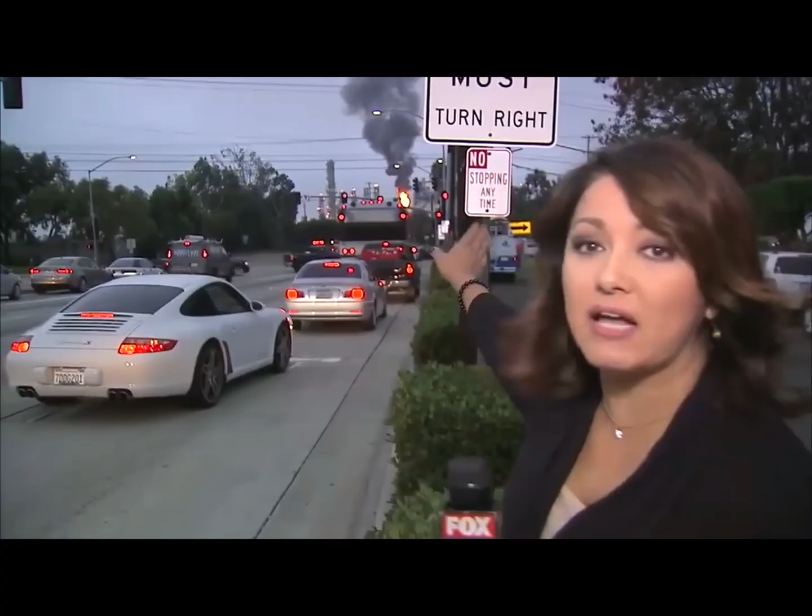Disturbances and incidents happen regularly in refinery utility centers. Operators are key in managing these and preventing that a disturbance becomes a big hit incident. What I experienced as a utilities technologist in the last 35 years is that many big hit incidents could have been prevented if operators and technologists would have been aware of the threats, and of course would regularly have discussed them. There were several actions that could have been taken to prevent the outcome, a total refinery shutdown, even after the first alarms arrived in the control room.

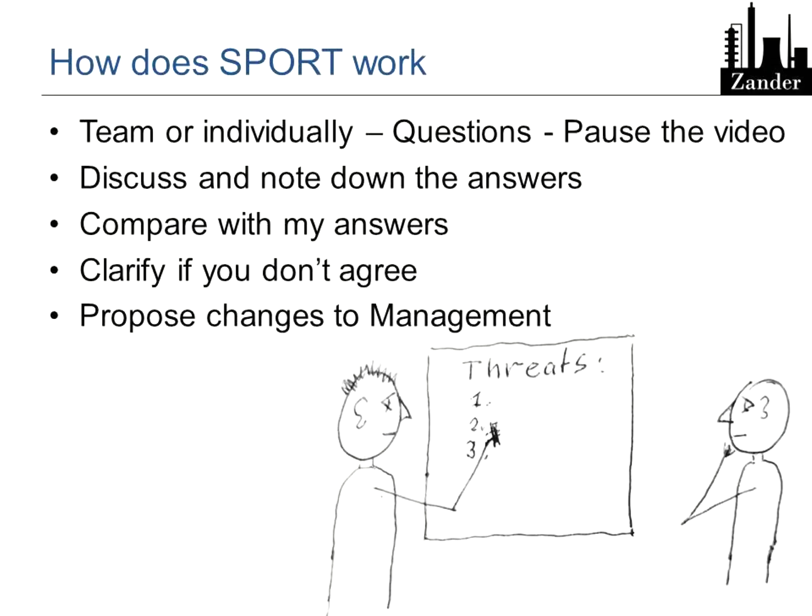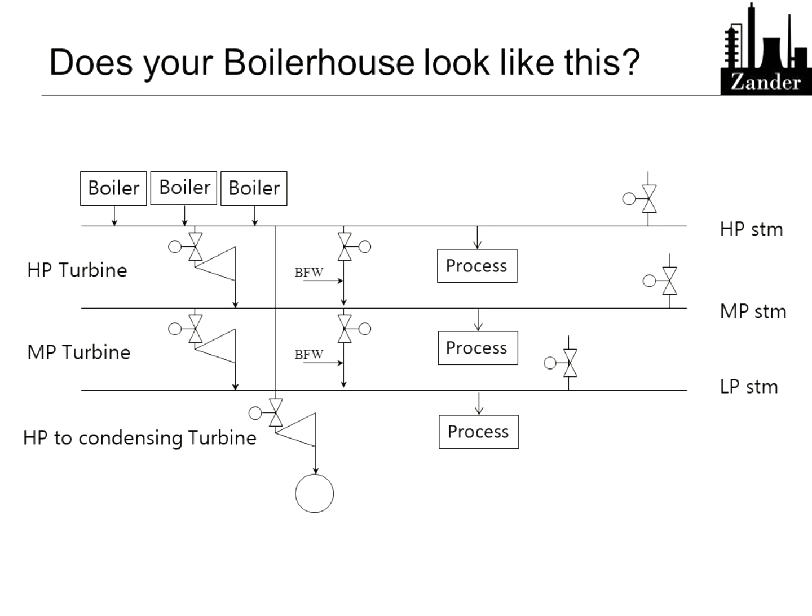Steam boilers are quite standard these days. For this picture, it is relevant that the boiler has a steam drum for separating steam and water, that there is a superheater, possibly with injection water for temperature control.

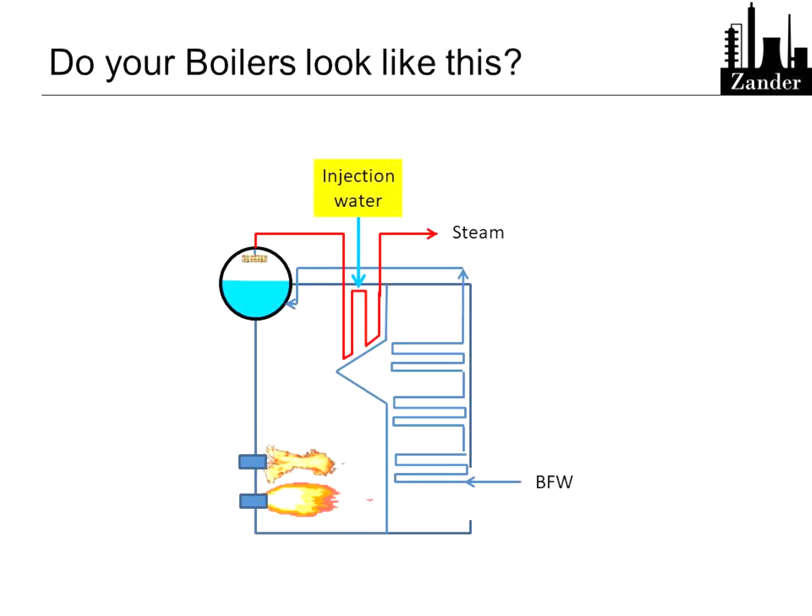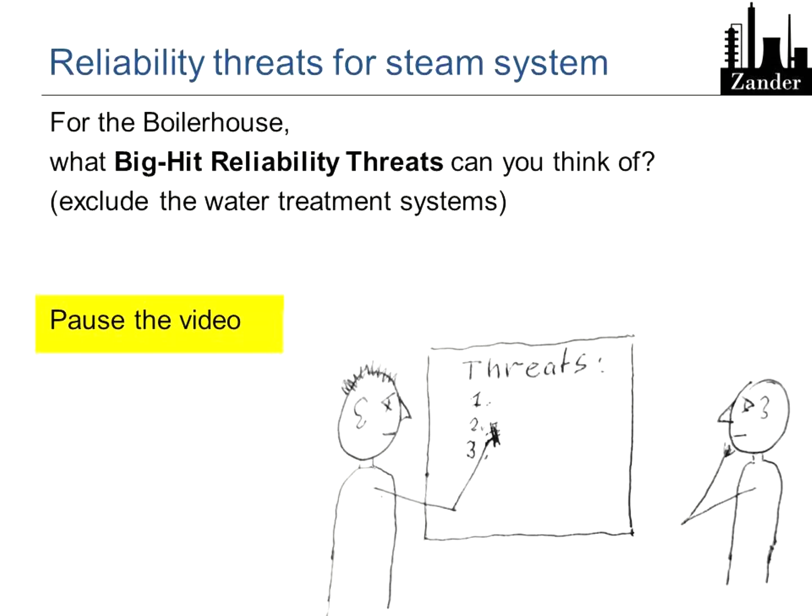In the systems just shown, what could possibly go wrong? Particularly the incidents that bring the refinery down are the ones I'm after here. Please note all your thoughts about risks around your boiler house. Now, please stop the video and start writing. Once you're ready, please start the video again.

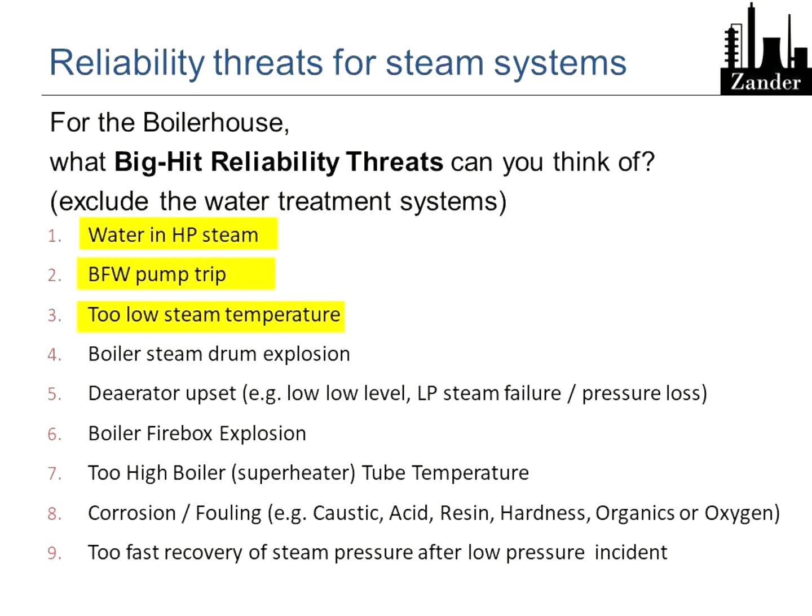I've come across a few incidents where at the startup of a boiler, either the water level in the drum was too high or the startup was much too fast. When steam production starts in the evaporator tubes, the steam bubbles push water to the steam drum. If this happens too fast, the water in the steam drum increases even further and may first affect the efficiency of the separator devices and then reach the superheater as a slug of water.

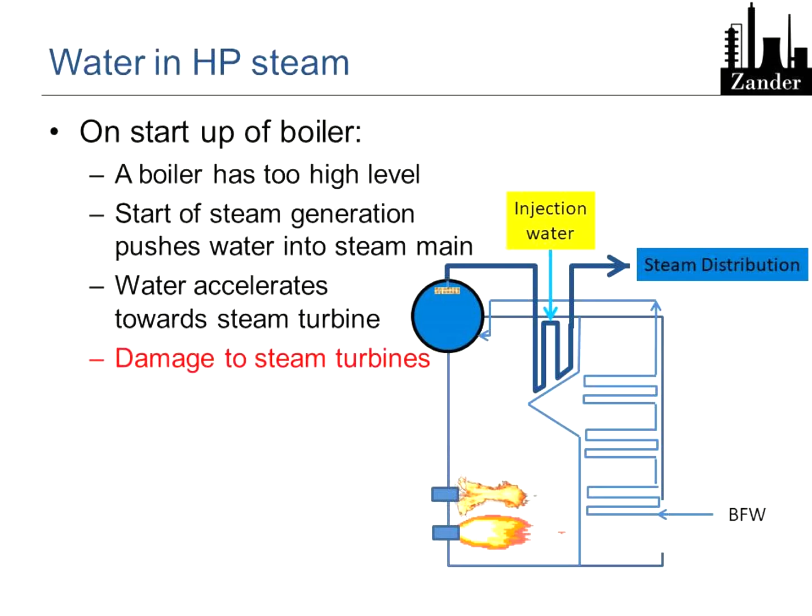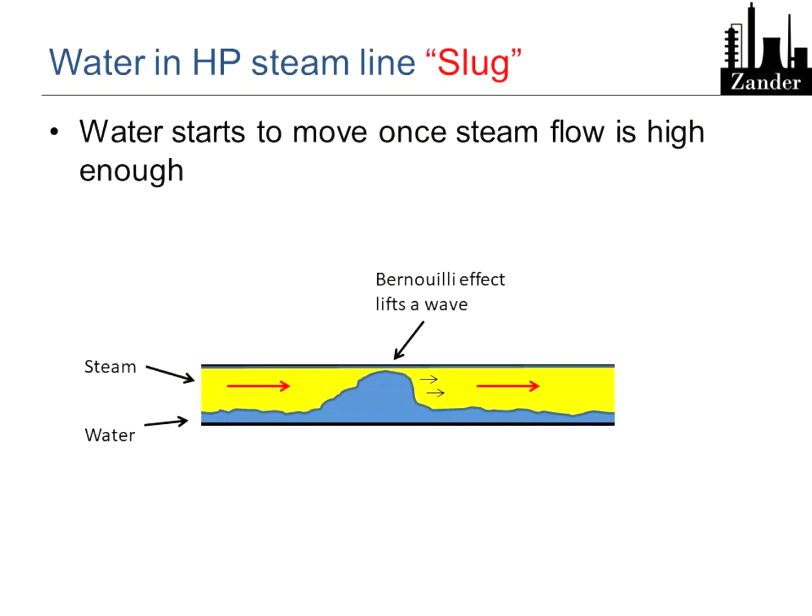This slug eventually reaches the steam distribution system. Don't think that this water will simply mix with the steam already in the system. As I've seen in a European refinery, the slug of water may stay at the bottom of a steam header, and once the steam flow really picks up, suddenly the slug will start to move at up to 40 meters per second, that is the steam velocity, and hit the steam turbine with devastating effect.

Occasionally, a steam line has to be brought online after a maintenance activity or something like that. The heating up of the steam line may come from the superheat of the steam or from condensation of the steam. The condensation inevitably happens when the steam line is still below the saturation temperature of the high pressure steam. In our 70 bar steam system, this means that while the steam line is still below 286 degrees Celsius, steam will...

...condense against the wall. This water should be removed from the steam line via a removal system. This could be with steam traps or with manual valves that ensure that the water is removed from the steam line.

If, however, too much water remains in the line, this could have three different devastating effects. Firstly, when the steam line starts to flow in service, a slug of water could damage a nearby steam turbine. By the way, this is one of the reasons why a steam turbine is usually connected to the top of a main distribution steam line. This way, the risk of water hitting the steam turbine is significantly reduced.

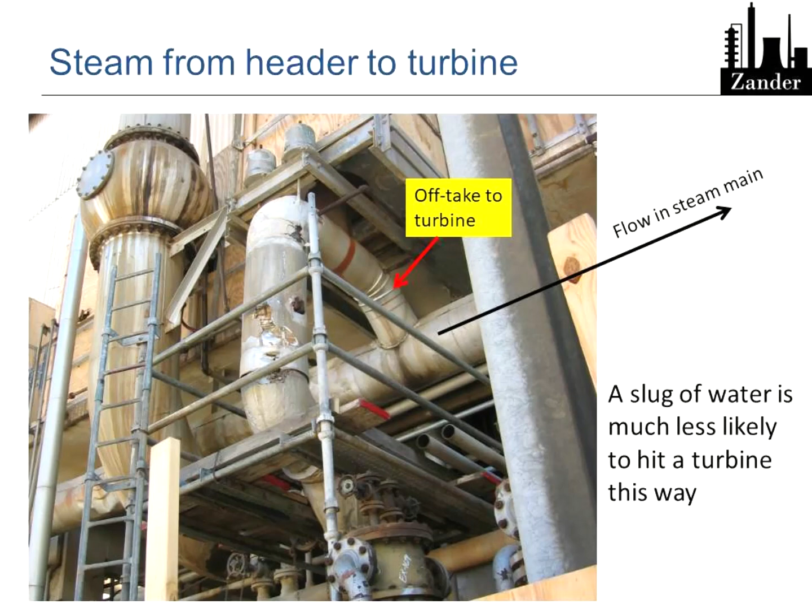If cold water is left in a steam line while the steam pressure increases, the water could stay cold, except for a small surface layer. The top of the steam line, however, heats up quickly because of the condensation of the steam on the wall. The top part of the line will therefore expand. The end result of this is erratic and potentially violent movement of the steam line on its supports. I know of a case where a steam line nearly hit an office of the manager of the boiler house.

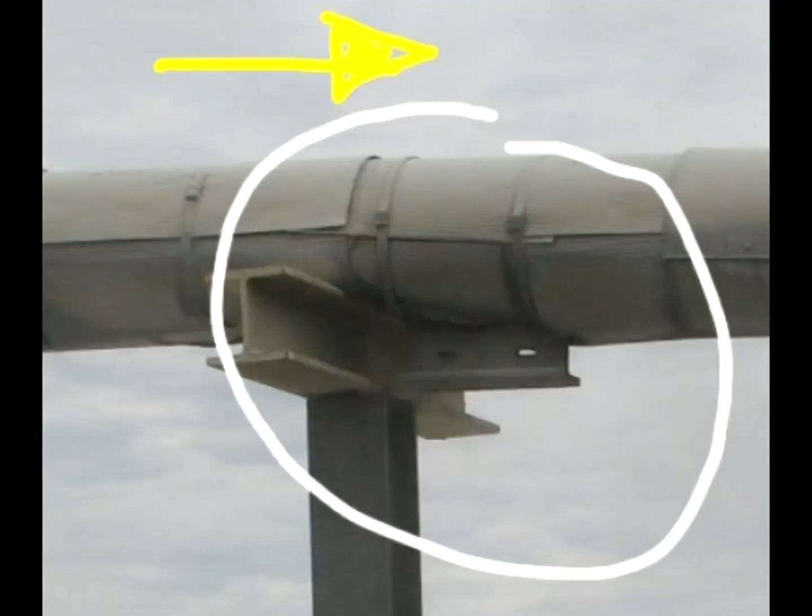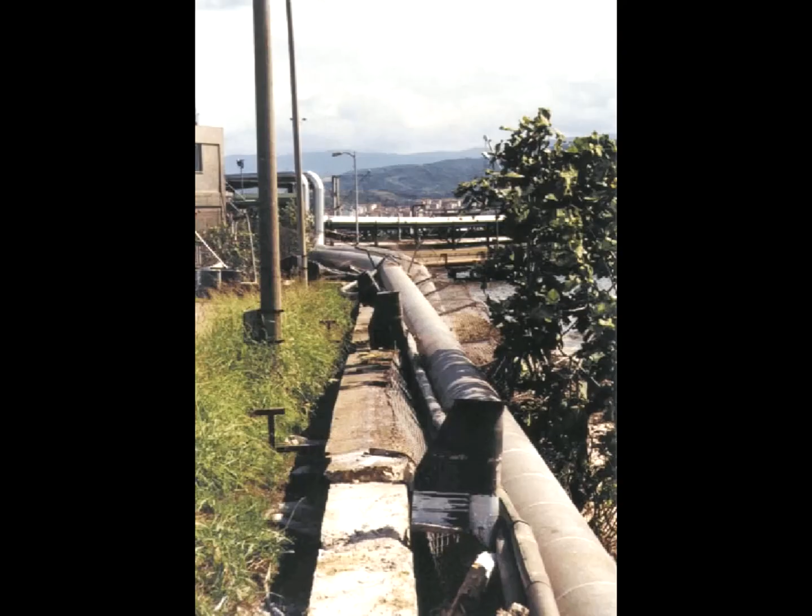This picture shows how much movement of steam lines is possible as a result of water in steam lines. There are enough examples where the steam line failed as a result of violent movements. Take a closer look at the supports of the two steam lines and the cracks in the concrete beam.

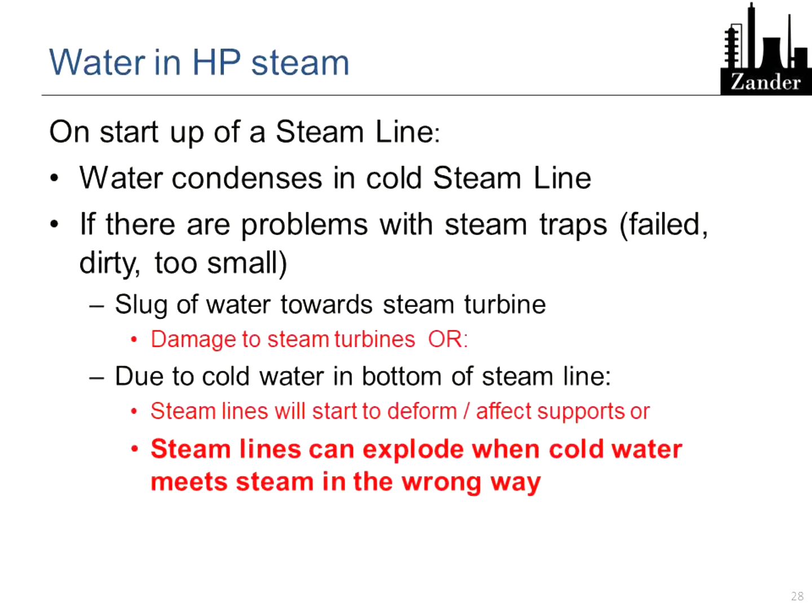Possibly the most surprising effect that could result from cold water in a steam line is an explosion. Such an explosion is caused by implosions of steam bubbles in the cold water. Compare it to the noise when in a coffee bar the steam enters the milk for making cappuccino. When the milk is cold, the noise can be very strong - this is the sound of imploding steam bubbles. Imagine that in a steam line this effect can be much stronger.

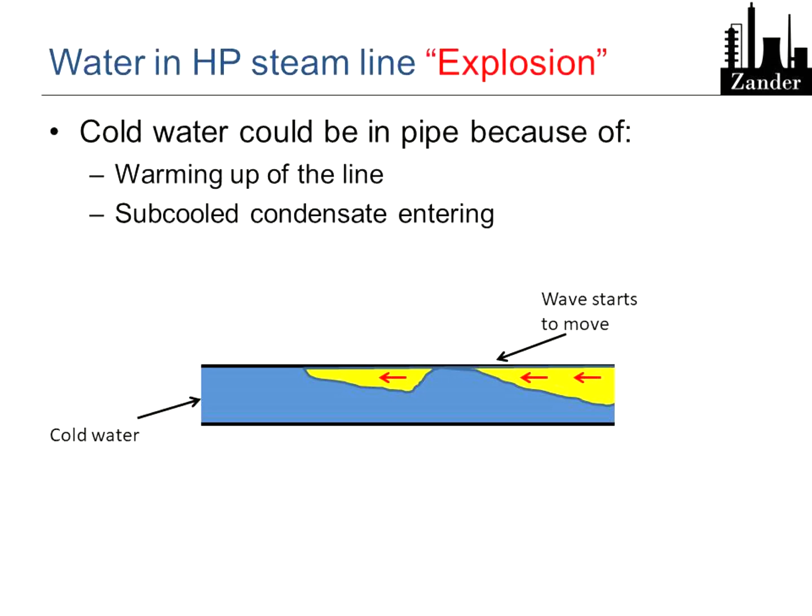Let's visualize what happens in this type of water hammer. When steam starts to flow, it creates waves on the surface of the cold condensate in the line. Once the wave is high enough, it creates a liquid seal in the steam line. Due to the movement of the water behind the plug, condensation of the steam continues. Due to the vacuum behind the seal, the plug of water accelerates until it collapses on itself and creates a strong pressure wave. You may have heard this type of noise in your refinery before.

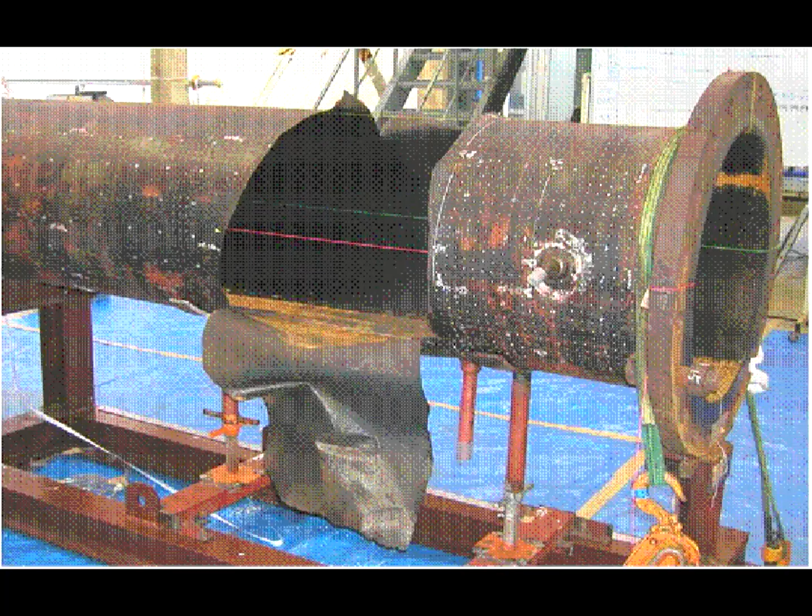In too many locations, steam lines have exploded as a result of condensation-induced water hammer. It can be devastating in HP steam lines.

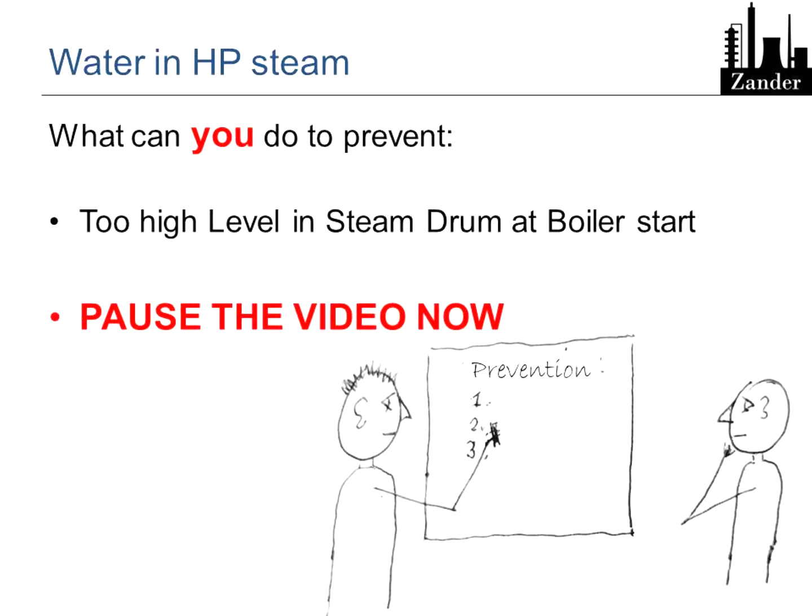Now back to the boilers. Please think about what you can do to prevent water carryover from the boiler into the steam distribution system. Most of the things mentioned in the next slides you're probably already doing, but it is good to think them all through. Now please stop the video and start writing. Once you're ready, please start the video again.

Start with the procedures - that's obvious. What do they state? What experience at your site has led to updates on the procedures? Have events around startups of the boilers been logged so you can have a closer look whether they work with respect to the water level?

My take on it is as follows: if each time that you fire up a boiler a high level alarm goes off, you may want to revise your procedures. One possibility here is to aim for a lower initial level in the drum before you really fire up the boiler.

If, however, the level stays steady as a rock throughout the startup, have a closer look at whether you're happy with the time it takes to start up the boiler, or whether tests can be scheduled to do it somewhat faster.

By the way, several boilers have a limitation on the speed to move from minimum stable firing to full load, based on expected fluctuations in the steam drum level. Check these facts for yourself. How does the drum level move when you fire up the boiler? And of course, is the level control scheme handling it very well?

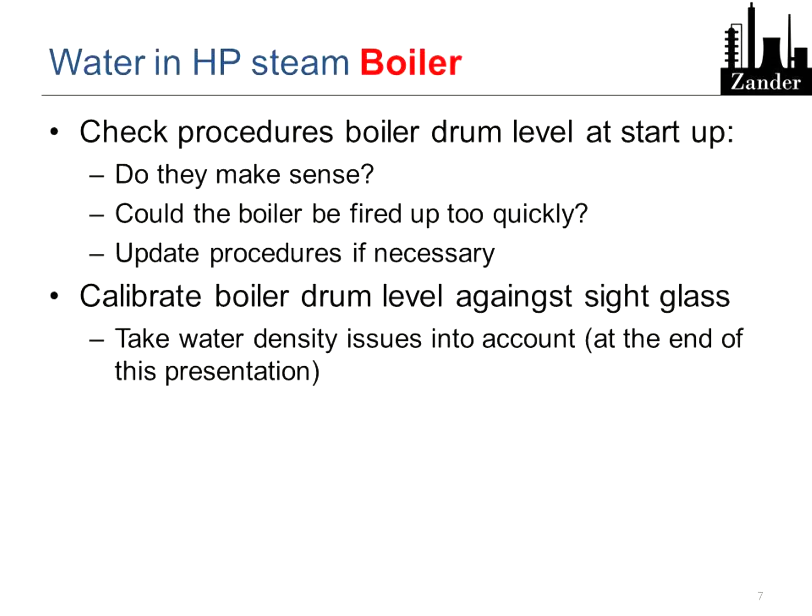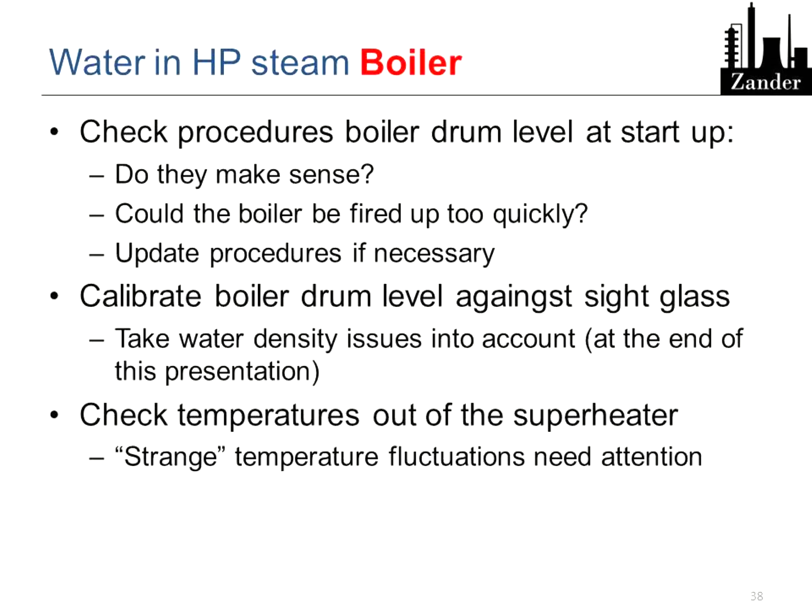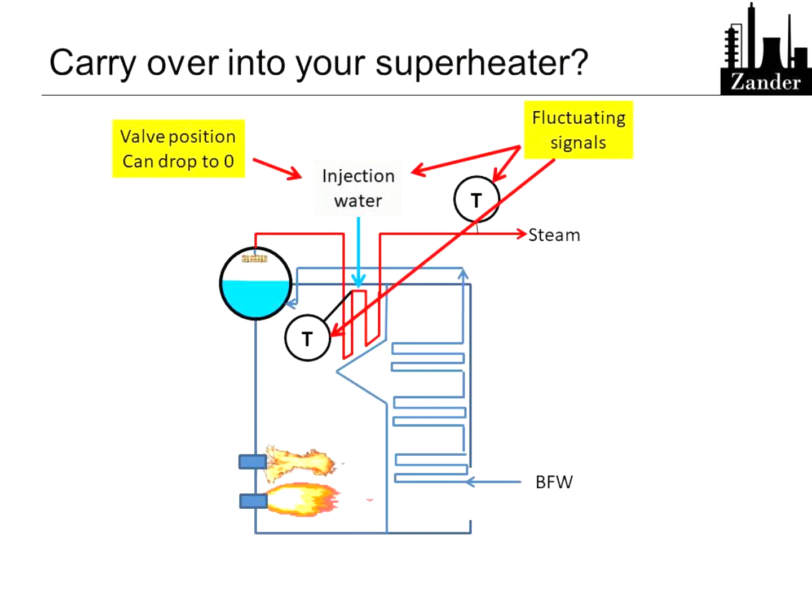However, in a minute we'll elaborate on this subject a little further. The final proof that there is no water leaving the steam drum with the steam is the temperature of the steam just upstream of the attemperator valve in the superheater, or even the position of the attemperator control valve itself. If there's over the years never an unexplainable deviation from normal valve positions and temperatures, this will be a good sign.

Let's have a closer look at the boiler drum and what to expect of it. In most high pressure boilers, there are at least two sets of internals present: cyclones and demisters. For them to work properly, the water level should normally be around the - well, you expected that - normal water level mark.

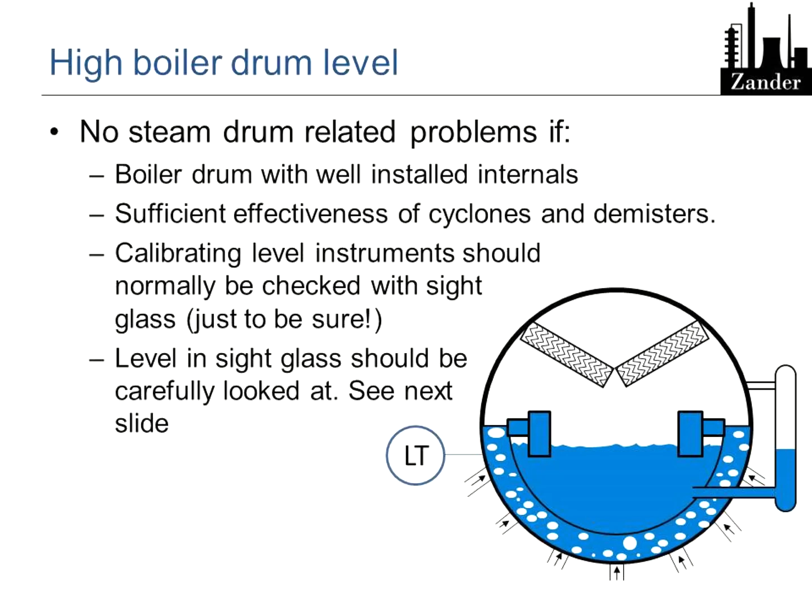But be careful. If it's really designed like that, the sight glass should be insulated. This slide shows that if the water in the sight glass is almost 60 degrees C colder than saturation temperature, the real level in the drum is significantly higher than indicated by the sight glass. Have a check how that's arranged at your boiler drums. If the sight glasses are not very well insulated, there is the risk of flooding the cyclones.

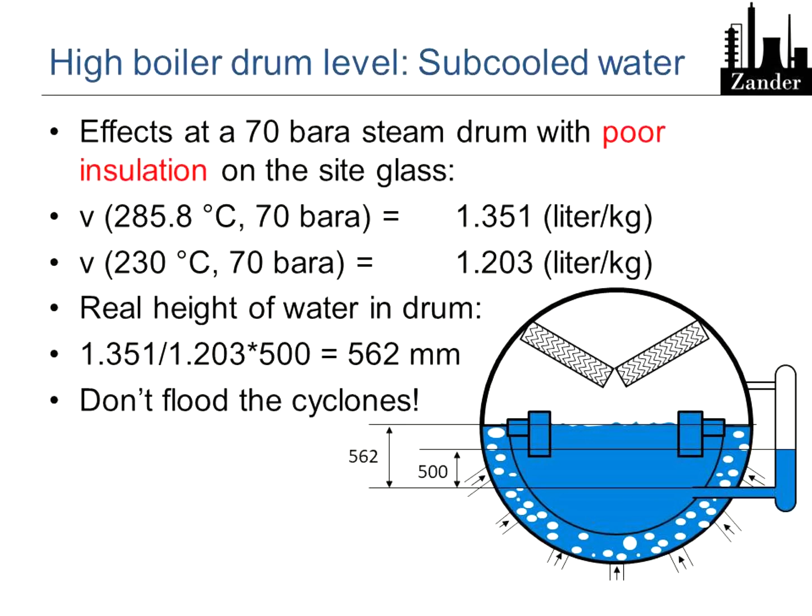This can be made worse by the dynamic movement of the drum level. A sudden pressure drop in the steam header will cause additional increase of the steam drum level. Please have a look at this problem and pause the video until you thought about this issue.

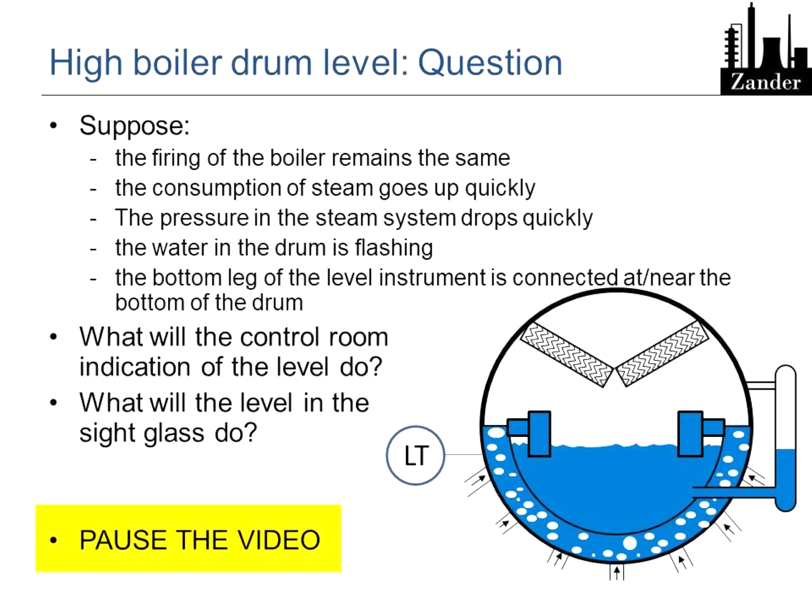Because of the flashing of the water in the drum and in the evaporator, the level in the steam drum goes up. In the sight glass, only the effect of the extra water being pushed out of the evaporator will be visible. The champagne effect in the drum will reduce the density of the water temporarily and should not lead to a higher sight glass level in itself. If the sight glass is very properly insulated, then there will be a champagne effect there as well. But subcooled water will not form steam bubbles under those circumstances.

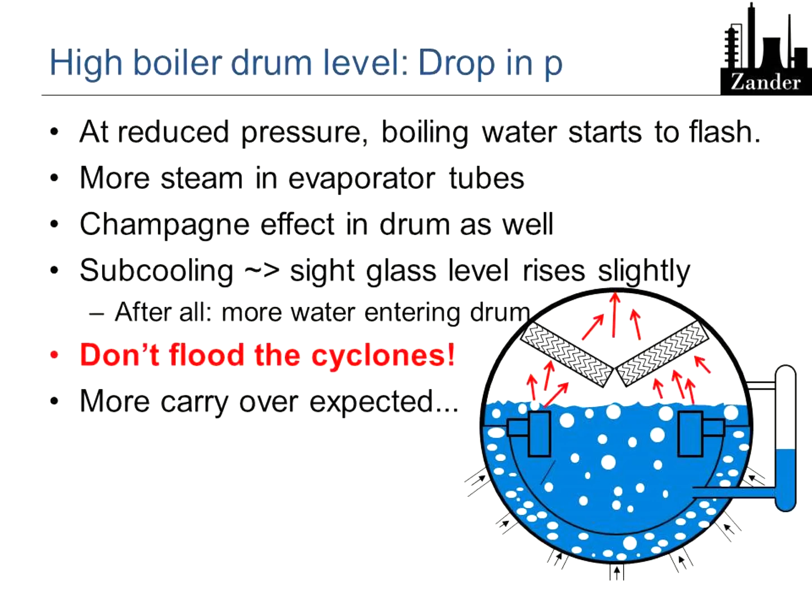I've worked at a European refinery where this effect on the steam drum was much larger than originally anticipated, and frequently the boiler tripped on high drum level. The remedy was to install a back pressure control valve on the superheated steam to the distribution system that kept the pressure in the steam drum constant.

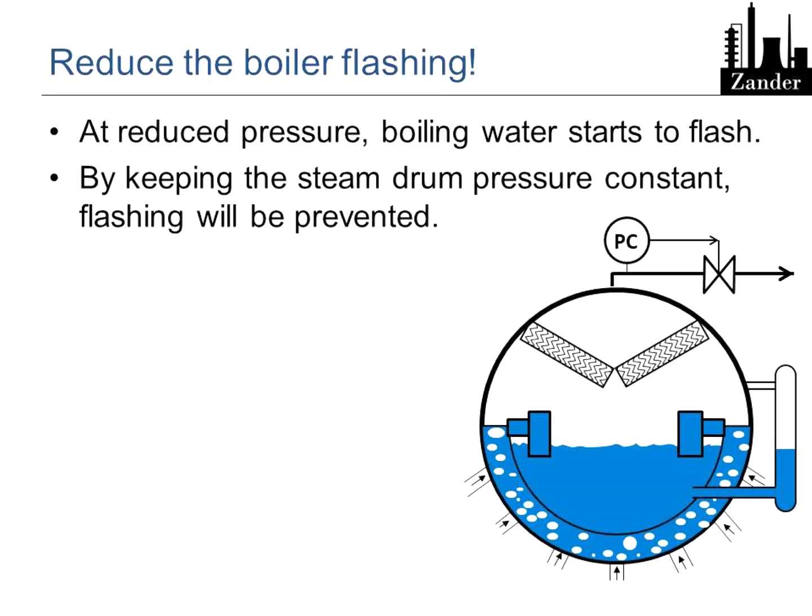I would like to suggest that the next time you see significant pressure fluctuations in your steam distribution system, you check how the level in the steam drum behaves. This will tell you whether you're close to high level trips in your steam drum and therefore close to problems. Discuss with your technologist or engineer if you see potential problems in this area.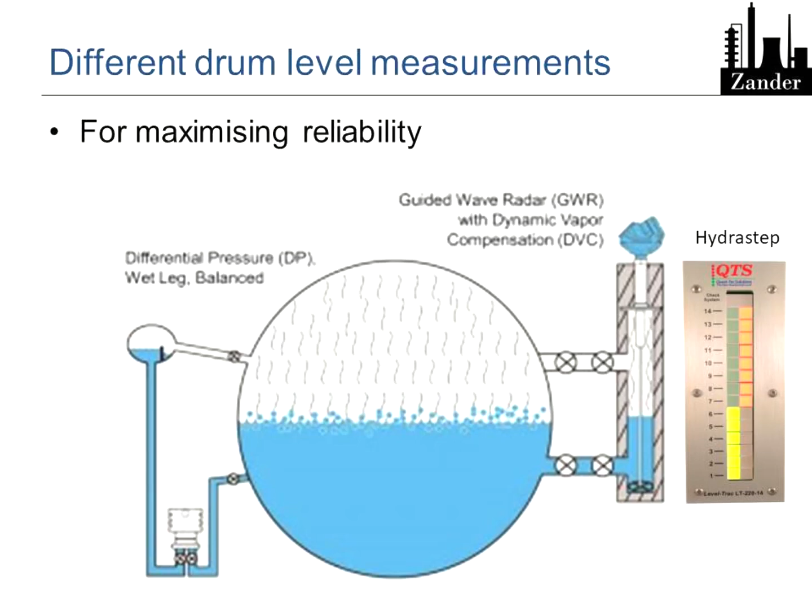The differential pressure measurement will not show changes in density of the water due to flashing, so under dynamic circumstances it could give a slightly too low indication of the true boiler drum level. Keep that in mind.

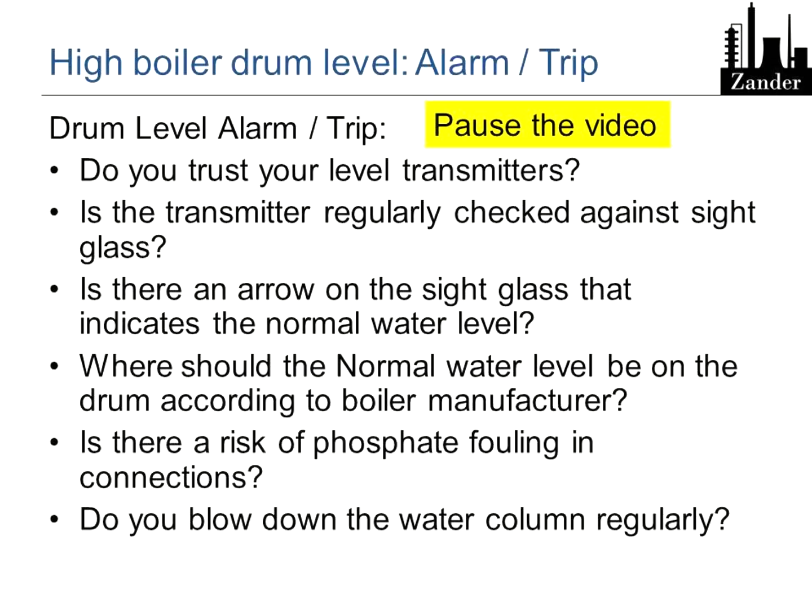In this picture you see some considerations about the various level alarms on your steam drum. Make sure that you know how it's done at your site.

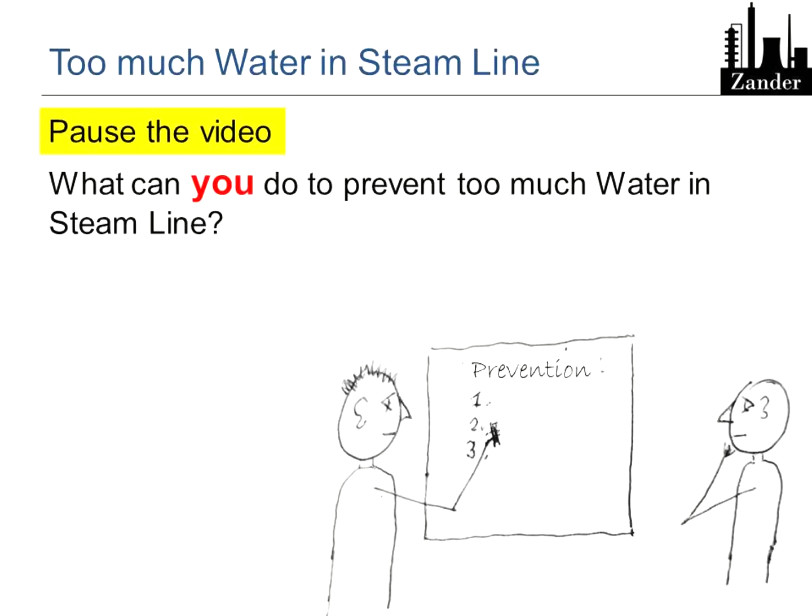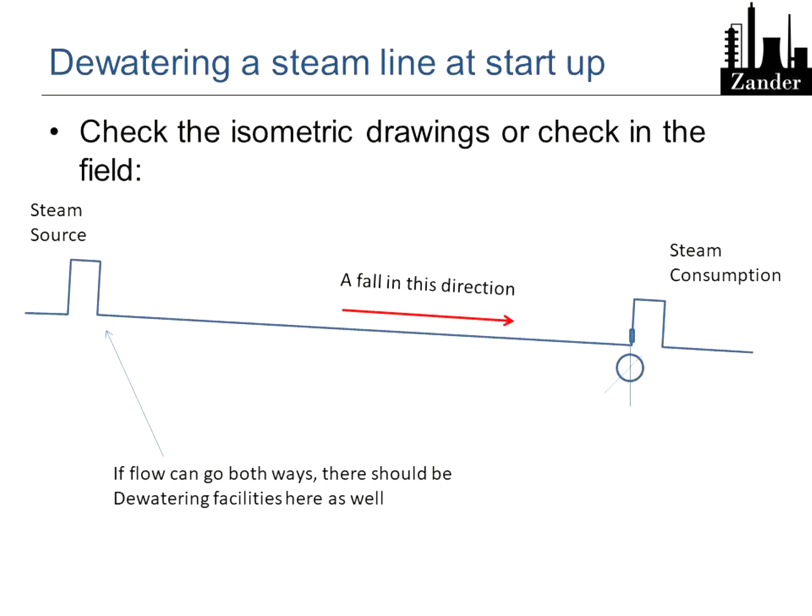You can do a couple of things around water in the steam lines at the heating up of the line. Check on the isometric drawings that there is a fall in the steam line in the direction of the steam flow during startup. Of course, every low point has to have draining facilities. But do they work properly?

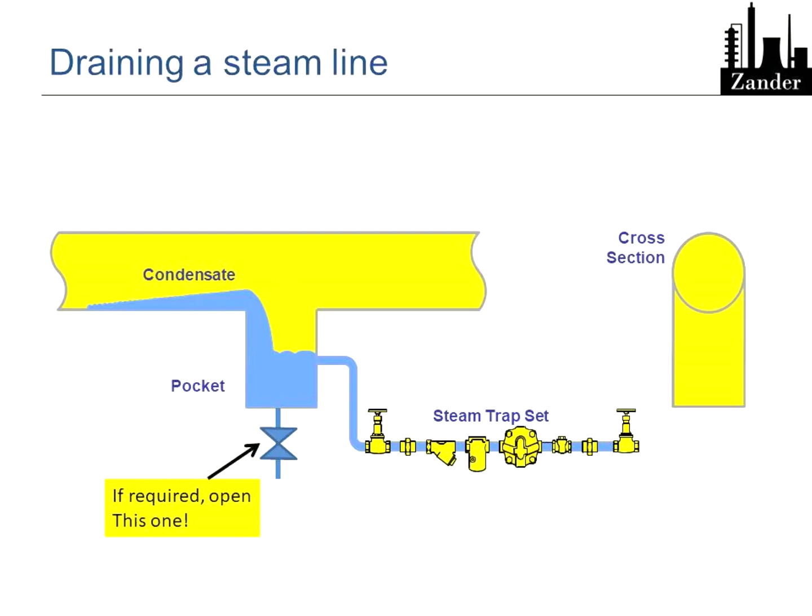In this case, reliability of the system is much more important than energy saving. So make sure that the water gets out, if necessary, by opening manual drain valves on the line. Do not leave water in the steam line.

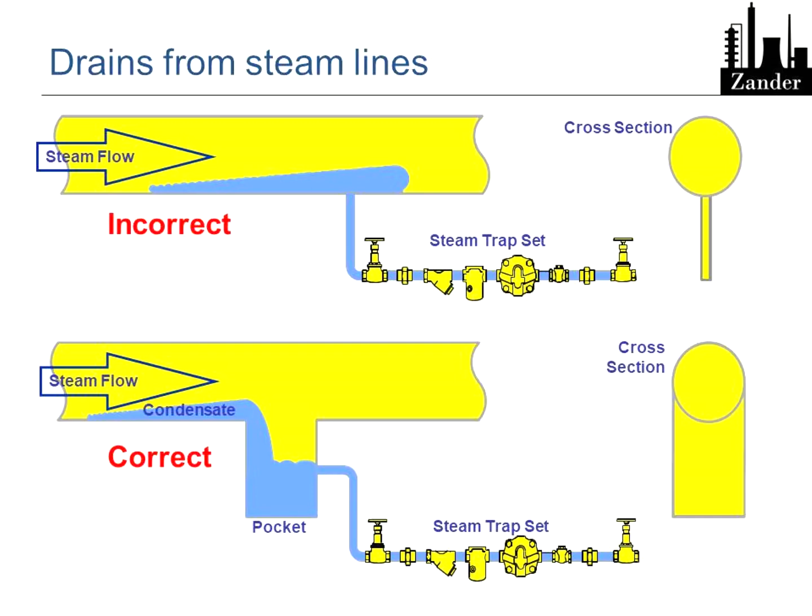The way the water is removed from the steam line requires some extra attention. If the dewatering is like in the picture above, then you have to be very careful with the steam line. In an incident investigation I participated in, a slug of water continued to exist in a steam line, even when the steam to the turbine downstream was already at normal superheated temperatures.

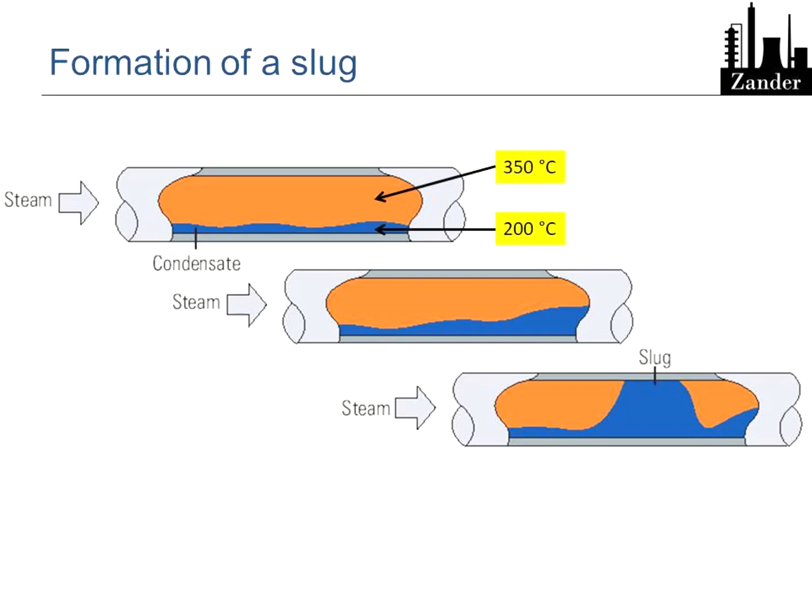When the steam flow increased, finally the slug started to move and damaged the steam turbine. Check your system for insufficient dewatering. If the condensate is roughly at the temperature of the steam, there may not be the risk of condensation-induced water hammer. But certainly slugs can do a lot of damage as well.

Now a different problem that I've come across in several refineries. Please note that in these refineries the boiler feedwater pumps all pumped into a common header, from which several boilers took their feedwater.

I've dealt with a refinery with some 9 boiler feedwater pumps. Because of the age of the pumps and due to the way the priorities of repairing the pumps, quite often there were weeks in which only 7 pumps were available and running. If, however, one more pump would trip, then there would be insufficient boiler feedwater to continue this operation.

Now stop this video and think what you would do in such a situation. Take your time. Discuss this with your colleagues when possible. Please note, you only have a few minutes to decide in the real world. And now you have some time to discuss it in full, what would happen in this case.

Hopefully, you came to the same conclusion. You have to reduce steam consumption so much that the remaining 6 boiler feedwater pumps can provide all the water.

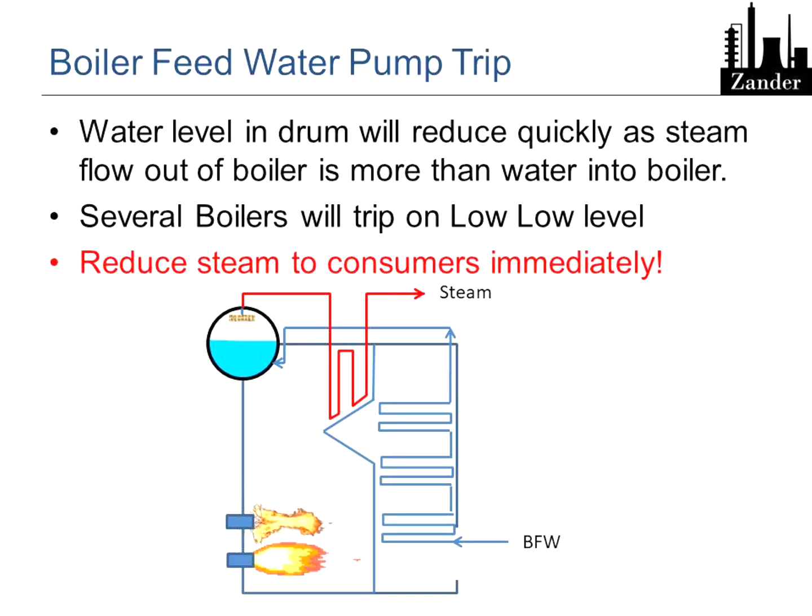Theoretically, there could be cases where the spillback valves on the pumps would be passing boiler feedwater back to the deaerator, and it makes sense to close these ones as well, if it is safe enough to do so and if allowed by your systems.

Even lowering the steam drum pressure by dropping the pressure in the distribution system could help to get the individual boiler feedwater pumps to a higher flow because of their pump curve.

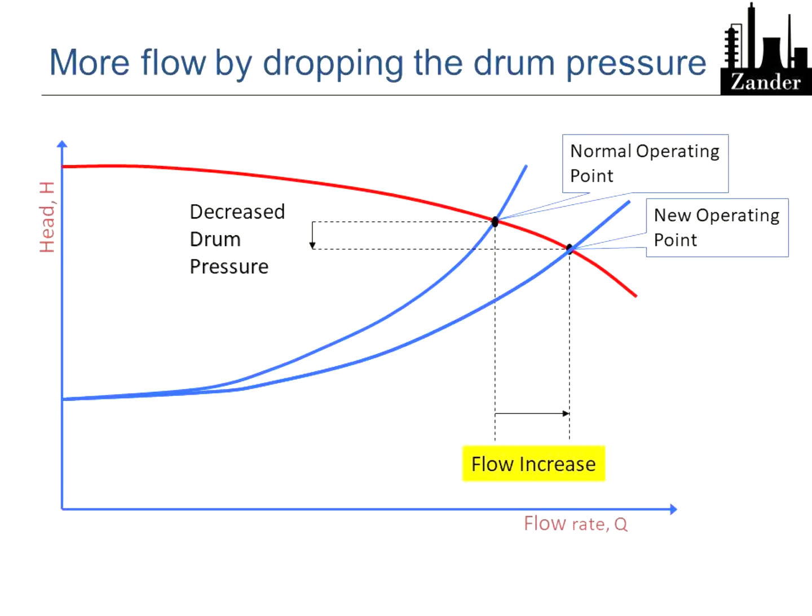If you would have the exact pump curves of your pumps, taking the current condition into account, this would make sense. But usually there's too much uncertainty around this. Therefore,

try to reduce steam demand directly. The condensing turbine that is controlled from the boiler house panel makes sense if you have one.

But possibly load shedding of a steam consuming plant has to take place. Don't wait too long with this load shedding.

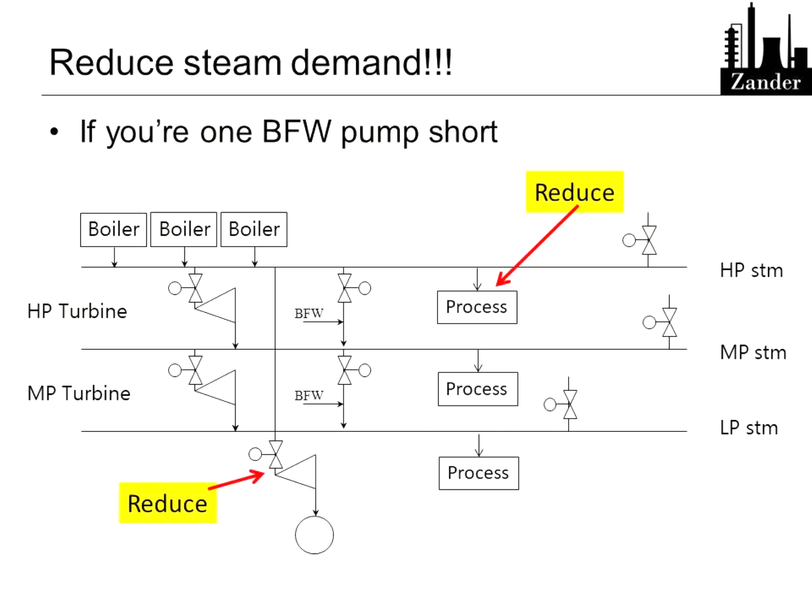Please note that this list of preparations to reduce the impact of a boiler feedwater pump trip is repeated below the video for your reference.

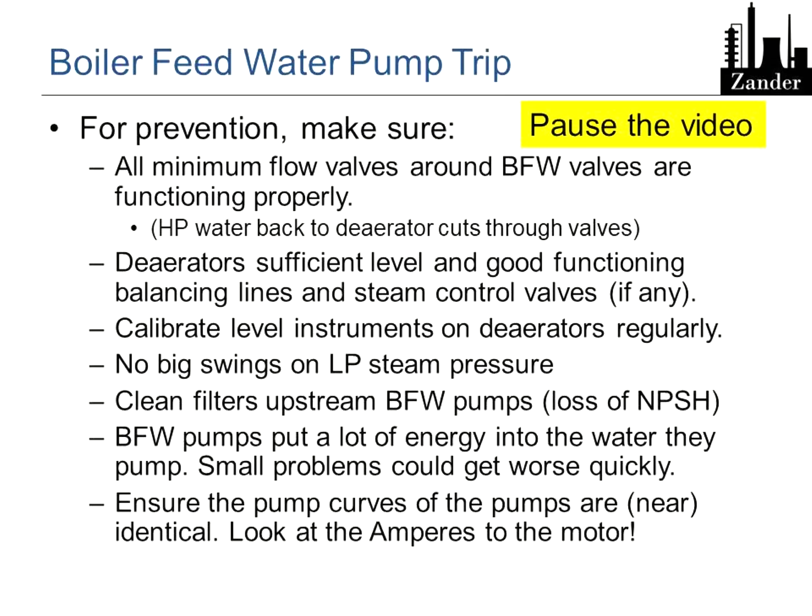A too low steam temperature from the boilers is a tricky one. There's usually not an alarm linked to it. Make sure that you are on top of it, because something has to be done to correct it.

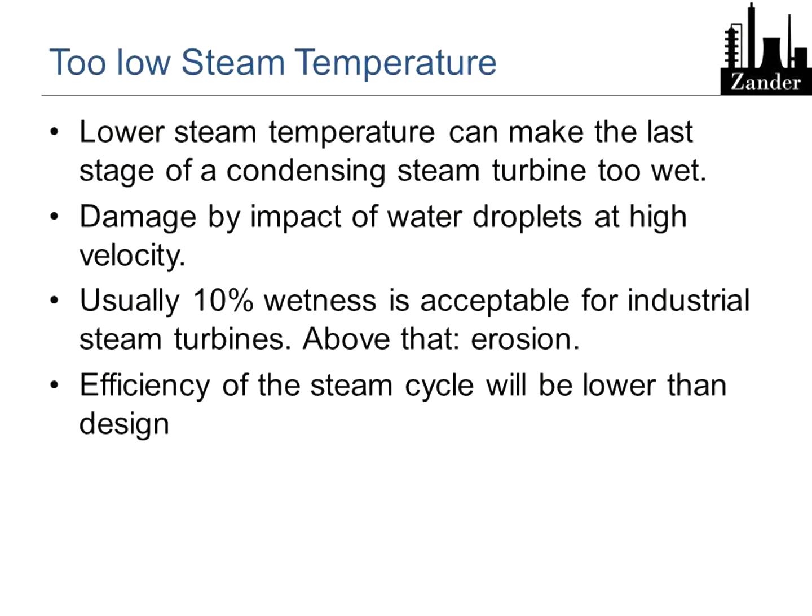Long-term damage can be done to condensing steam turbines, as the increased wetness in the last stages of the turbine will give erosion or wear on the blading.

In the enthalpy-entropy diagram, or Mollier diagram, it is visualized what will happen in a condensing steam turbine when the steam temperature becomes too low. The 90% line in the diagram symbolizes the minimum quality steam the turbine should be able to consume.

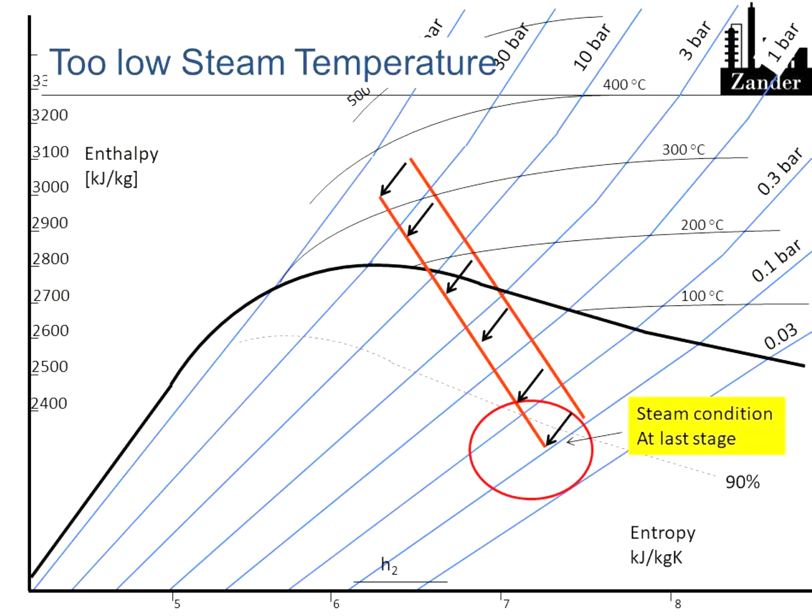This means that 10% of the steam has already been converted to water droplets, and it's these water droplets that do a lot of damage to the steam turbine.

Please pause the video and think about the possible causes of a too low steam temperature from a boiler. In what kind of time frame does it need to be solved?

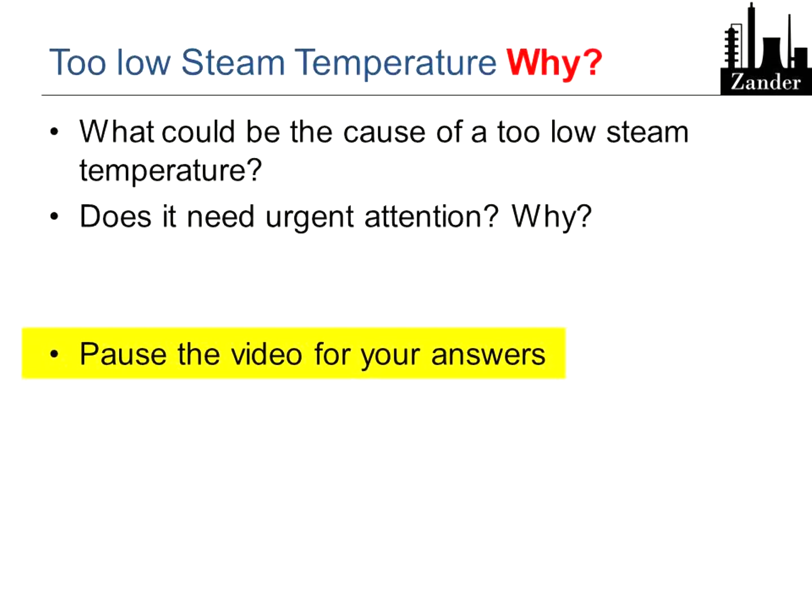Have a look at this slide. Pause if necessary.

It may be the result of: 1. Injection water control valve erosion. What I came across is a boiler that did have the full boiler feedwater pressure at one side of the control valve and no pressure at the other side.

That happened during startup of the boiler, when the steam pressure was 0. Small scratches on the seat surface will quickly result in more erosion and eventually significant passing of the valve.

One clear sign that something is wrong with this valve is if the temperature control loop functions well at higher throughputs of the boiler, but starts to fail at low throughputs, because even at minimum stop the valve will pass too much water.

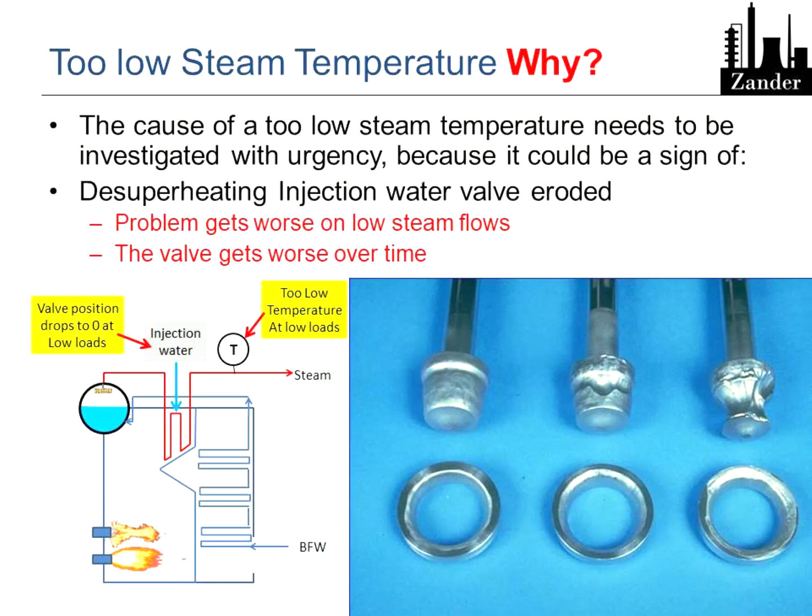2. Problematic steam drum internals should be prevented by good design, but also by careful checks when the cyclones etc. are installed again after a turnaround.

I've come across cases where the inspection department didn't have proper inspection of the internals on their action list. In cases where the inspection was very effective, it was a utilities engineer or technologist who inspected the internals. Make sure this is arranged correctly in the next turnaround of a boiler.

3. Steam drum level measurement has been dealt with before.

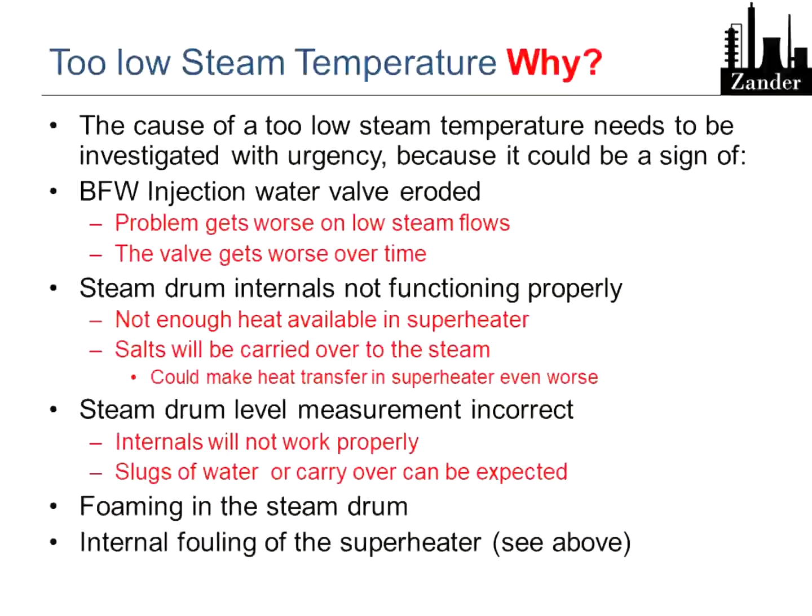4. Foaming is a problem I came across quite recently. Oil entered the boiler via oil contaminated condensate, returning to the boiler house, and various barriers were failing.

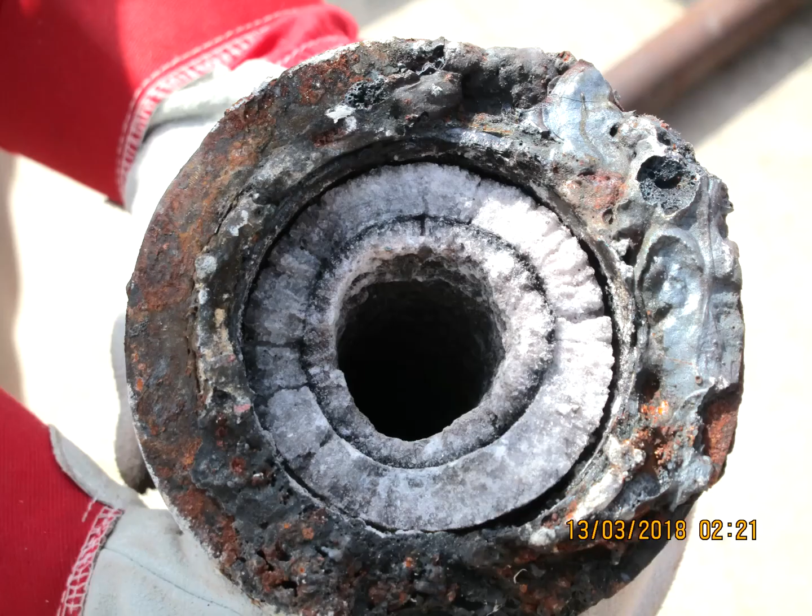Internal fouling of the superheater is usually caused by carryover of salts by one of the problems on this slide.